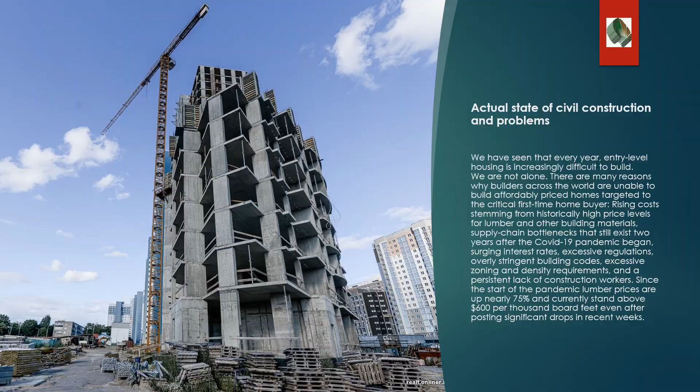China real estate crisis is trigger of construction crisis in entire world. The burst of the bubble in the Chinese real estate market, which many experts have been warning about for so long, is closer than ever.

Following the largest developer Evergrande, which defaulted on its bonds, several other developers, who were actively attracting international capital, had problems with paying off the debts.

The Chinese authorities will not be able to save all the credited companies in distress, and so far, they are not particularly striving, and therefore, there is a high probability of a chain reaction, given the traditionally high level of ties between developers.

Analysts are doing their best to calm the market, assuring that a repeat of the global crisis of 2008 should not be expected yet, but the dynamics of the construction industry, one of the main drivers of the Chinese economy, has turned out to be a big question.

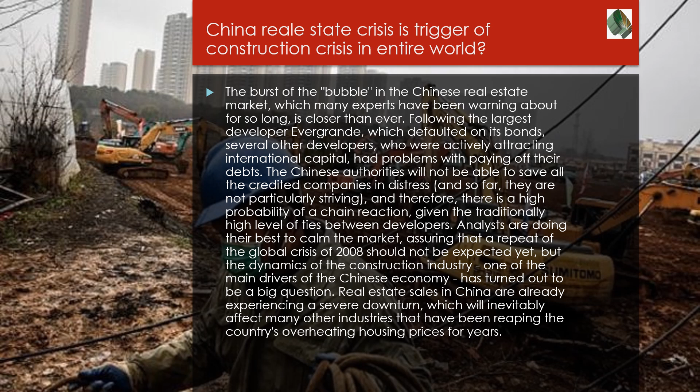Real estate sales in China are already experiencing a severe downturn, which will inevitably affect many other industries that have been reaping the country's overheating housing prices for years.

There are about 1.7 billion people in the world who are homeless or living in terrible conditions. For them, it is necessary to build about 430 million houses, 4 people per house average.

How to build traditional: for the construction of a 1-2 story house it takes about 63 cubic meters of concrete. That equals 9 cubic meters of cement, 1.7 cubic meters of river sand, 3.3 cubic meters of crushed stone, 1 cubic meter of water, and 6 tons of rebars.

To produce the most energy-intensive parts, 1 ton of cement and 1 ton of reinforcement, it is required to spend about 4 and 22 gigajoules of energy accordingly.

That is, the total cost of a house is 192 gigajoules. At the same time, to produce this, 16 to 17 tons of CO2 are released.

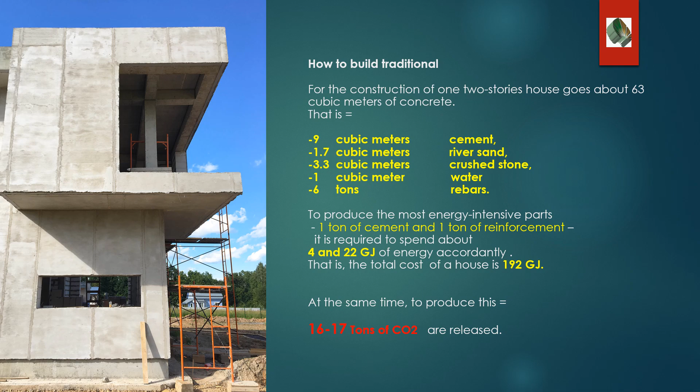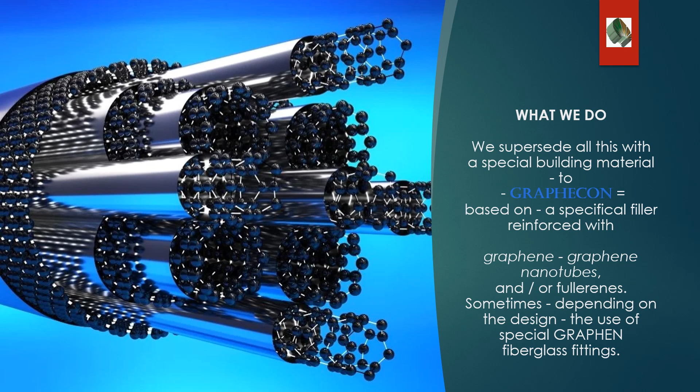What do we do? We supersede all this with a special building material, GrapheCon, based on a specific filler reinforced with graphene nanotubes and/or fullerenes. Sometimes, depending on the design, we use special graphene fiberglass fittings.

We can build 430 million houses in a maximum of 10 years. One house built in 2 days.

Position number 1: the technology of using non-traditional construction feedstock isn't all that new. This idea, so to speak, is already in the air.

There are already small but real projects for the construction of houses from non-traditional materials, for example, Holland plastic houses in Amsterdam, China plastic constructions in China, using, for example, a special bioplastic from the company Henkel.

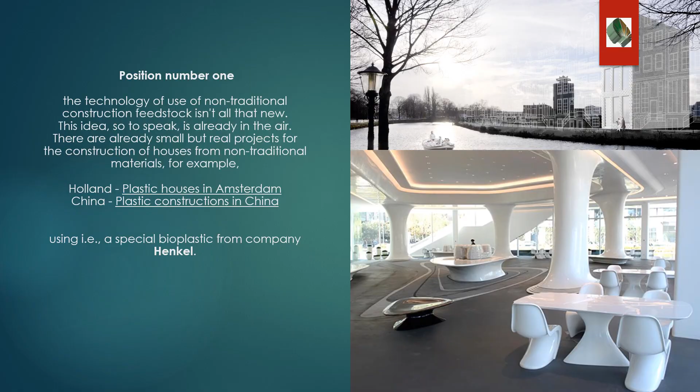We use recycled plastic with the help of a special unique technology, Vortex. We convert it with simultaneous modification into a special durable porous material.

Any plastic can be converted without sorting, cleaning, or washing, with the possible content of foreign inclusions of wood, tetra pak, paper, aluminum foil, fishing net, films, food waste, soil, etc. The resulting material has closed pores. It is hard, like durable wood or aluminum.

Because the pores are closed, it doesn't accumulate moisture, mold, or germs. It's resistant to ultraviolet light, wind, and sediment. It's non-combustible and doesn't emit harmful gases when exposed to fire. At the same time, it can be painted, sawn, treated with varnishes, and used for gluing ceramic wood cladding.

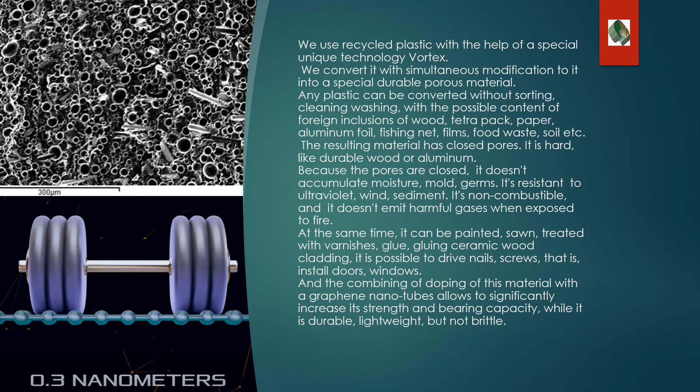It is possible to drive nails and screws, that is, install doors and windows. Combining this material with graphene nanotubes allows us to significantly increase its strength and bearing capacity, while it remains durable, lightweight, but not brittle.

Position number 2: the use of our development, a construction 3D printer that allows you to print a house in 2 days using artificial intelligence components. At the same time, almost everything will be printed in the house at once: the roof, stairs, built-in furniture, sewerage, water supply, ventilation channels, and electrical wiring.

Our printer does not have the disadvantages of a concrete printer. The layers crystallize in a short time, leaving no traces of a ribbed surface. The walls are smooth and do not require additional processing, giving them a beautiful aesthetic appearance. The nozzle and hoses do not clog, so there is no time wasted reloading.

The thermal insulation properties of the GrapheCon are such that it is warm inside the house in winter and cool in summer, meaning you need minimal costs for heating and cooling using recuperation. As a source of electricity, a built-in HMD generator or SMR is used, depending on the concept. You can also use solar panels, a wind generator, a heat underground pump, or a sun heat water generator.

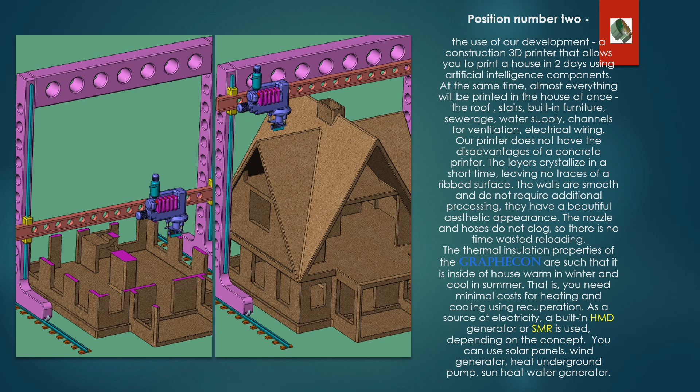Economics: the material of the house costs nothing, only logistics. Each house is made from plastic waste.

There is more than 330 million tons of waste in the ocean alone, and 8 million tons are added to the ocean each year. This material fits our technology, and we make pellets on a ship, then send them to consumers in the field where the Avis Print 3D printer operates.

Of those 330 million tons, we can make 46 million homes. One house weighs about 7 tons. In fact, only about 10% of the plastic waste ends up in the ocean.

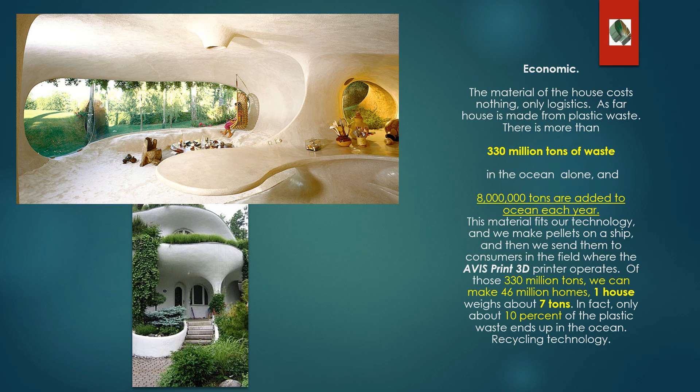The essence of the technology: without changing the chemical properties, we break down polymers into monomers and then cross-link them into a universal polymer.

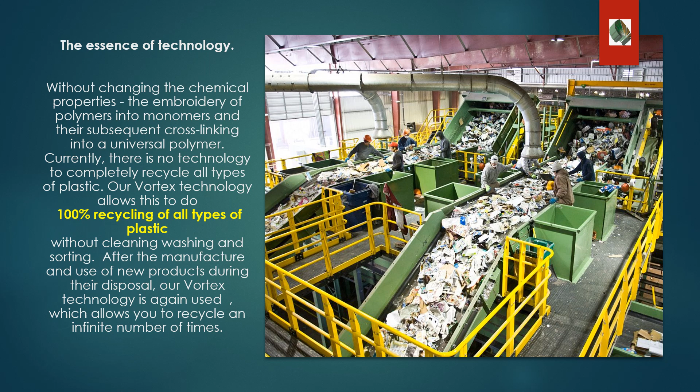Currently, there is no technology to completely recycle all types of plastic. Our Vortex technology allows this to be done: 100% recycling of all types of plastic, without cleaning, washing, or sorting. After the manufacture and use of new products, during disposal our Vortex technology is used again, which allows recycling an infinite number of times.

Advantages: 1. Saving resources across 430 million houses. In houses we save cement, minus 3.8 billion tons; rebar, 2.6 billion tons; fresh water, 430 billion cubic meters; river sand, 730 million cubic meters; crushed stone, 1.3 billion cubic meters; and save energy, 18,000 TWh. This is about 13% of the world's annual energy consumption.

2. Saving CO2 emissions of 6.7 gigatons, about 18% of the world's emissions. 3. Solving the issue of homelessness. 4. Solving problems of unemployment. 5. Solving the issue of settling empty territories. 6. Giving civilization to all people, with the benefits of electricity and internet. 7. In case of termination of the house's functioning, it can be transported at 7 tons, being lightweight, or recycled very easily. 8. Extermination of stocks of plastic waste, improving the environment from toxins.

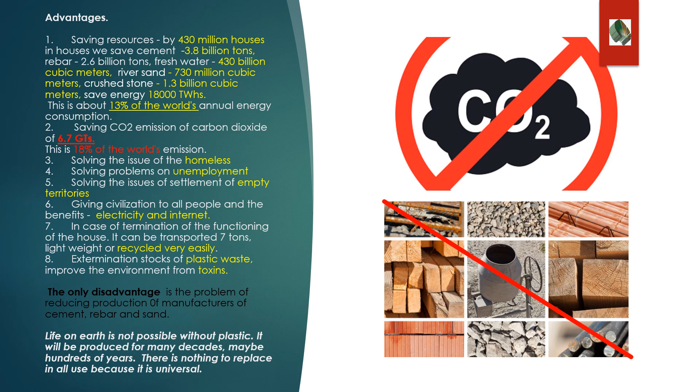The only disadvantage is the problem of reducing production for manufacturers of cement, rebar, and sand. Life on Earth is not possible without plastic. It will be produced for many decades, maybe hundreds of years. There is nothing to replace it in all its uses because it is universal. All materials changed into one.

We offer a technological solution. You can build 430 million homes in 10 years if we produce 60,000 printers, or in 5 years if we have 120,000 printers, or in 1 year if we produce 600,000 printers. This is not that many, given that 77.5 million cars are produced in the world every year, and our printer is 100 times simpler than a car.

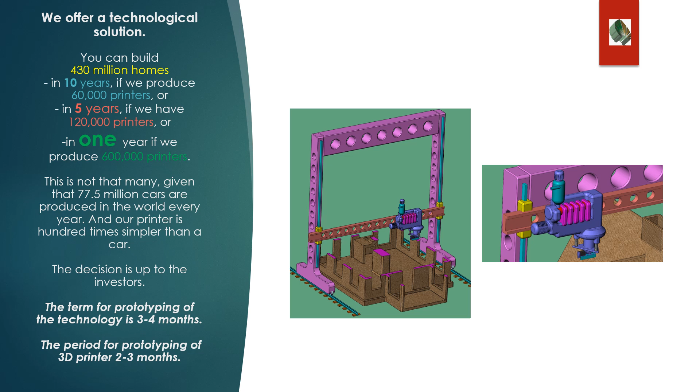The decision is up to the investors. The term for prototyping the technology is 3 to 4 months. The period for prototyping the 3D printer is 2 to 3 months.